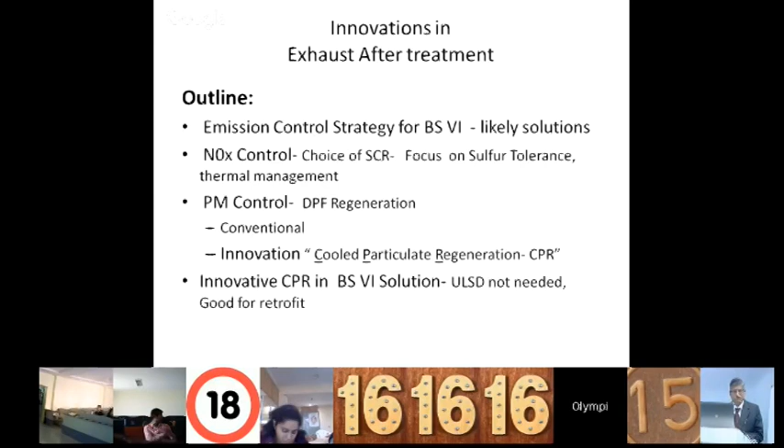In this program, I'll talk about the emission control strategies for BS6, what are the likely solutions seen internationally. India is yet to implement them in 2020, but our preparation is going on. There are two major issues: NOx control and PM control. So what can we do here, and what are the types of innovations in these technologies.

Because once India implements this in 2020, the world will have already implemented it - the US has implemented it, Europe has. So we have some choices available. What can be the right choice for us? This is what we have to focus on.

Then I'll speak about some innovative solutions where I'm involved and feel they are good for the country.

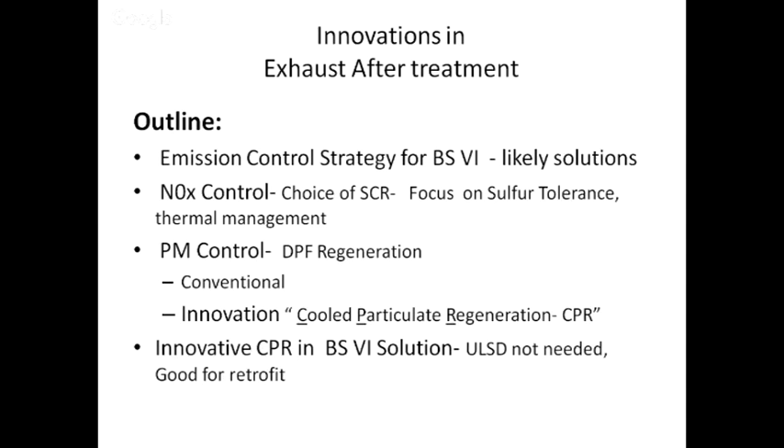One thing is very clear: in any control strategy, we have to control both NOx and PM. In an IC engine combustion, there is a trade-off - if NOx goes up, PM reduces. You can have technologies to improve PM, but then NOx goes out of hand. This simultaneous reduction of NOx and PM, which is the aim going from Euro 3 to Euro 4 and Euro 4 to Euro 6 level, poses problems and challenges. Of course there are a few technologies, like fuel emulsion.

Last year, in this same forum, I talked about some technologies which can reduce both NOx and PM together - water and diesel emulsions, which bring down peak combustion temperatures. But traditionally, an engine with normal fuel will have both NOx and PM going against each other - if you try to control one, the other goes up, or vice versa.

So we need to handle it in the after-treatment systems. And how do we do that?

Another thing that makes India different, or every country different, is the type of engines produced, the maintenance practices followed, and the driving cycles - because congestion differs across countries, and even across different cities in India. So there are challenges and opportunities which I will call local. It's not necessary that what is good for the US system is equally good for Indian applications - some tuning will likely be required in any case.

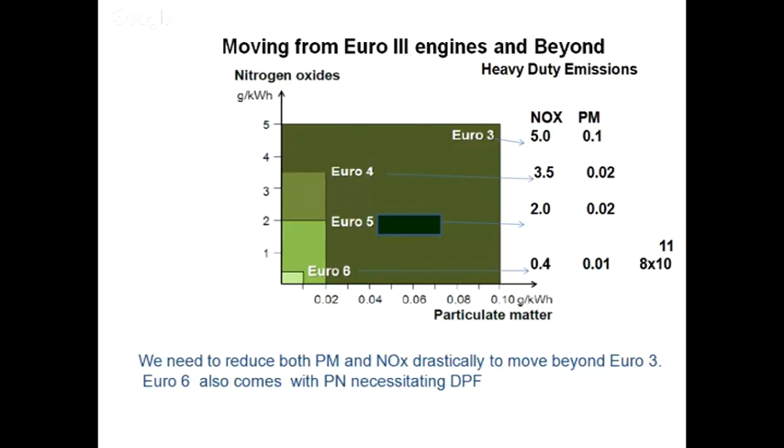Euro 6 also comes with PN limits which necessitate DPF. Before I move further into the program, I'd like to introduce a few terminologies here which we will be referring to in the next slides.

There are a few technologies which are PM related, that is, reducing particulate matter. For example DOC, the diesel oxidation catalyst. There's a partial oxidation catalyst which is called POC. Then there's a diesel particulate filter, and there's a new innovative technology called cooled particulate regeneration. Because when you have a diesel particulate filter, what happens is the filter absorbs the carbon soot onto it and sends

the clean exhaust out. But then with time, the filter gets choked, which creates back pressure. So you need to regenerate it. There are technologies for regeneration on DPF, which we'll be talking about.

Then there's NOx related technologies like EGR, exhaust gas recirculation, which is an internal management technique to reduce peak temperatures in the system so that NOx comes down. Then there's SCR, which is based on urea injection or other technologies. Once you have urea in the system, urea converts to ammonia, and ammonia does the reduction

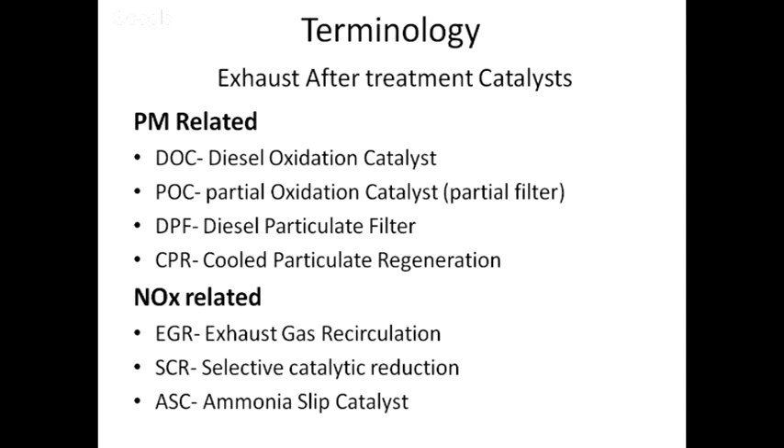part. But then ammonia also slips. If you have more urea, then more ammonia comes out, and you can't allow more ammonia to go to the atmosphere because it's also toxic. For example, BS4 has a limit of 20 ppm maximum ammonia that can escape. Similarly, in Euro 6 you have a limit of only 10 ppm. So these are the types of catalysts which you'll be using in the system.

So I said that challenges and opportunities are local in BS6 and its equivalent. If you look at Europe, Euro 6 has been there for the last 4 or 5 years. So the first generation vehicles which came as Euro 6 were basically having solutions like DOC, DPF, SCR, and ammonia slip catalyst.

And SCR was a particular type, a copper zeolite which was sulfur intolerant. So they could introduce sulfur at low levels, and they could live with copper zeolite. So heavy duty manufacturers then revisited this, but there was a problem. The solution which came up first in Europe was giving a fuel penalty to the engine.

It means in regenerating DPFs, they were burning more fuel to get to the high temperatures where they can regenerate the DPF, burning the carbon from the DPF and bringing down the back pressure. And since temperatures were going out of control, they needed a catalyst which can survive, and that was the copper zeolite catalyst. But then they started relooking at other options that were less expensive in terms of catalyst cost and fuel penalty on the engines.

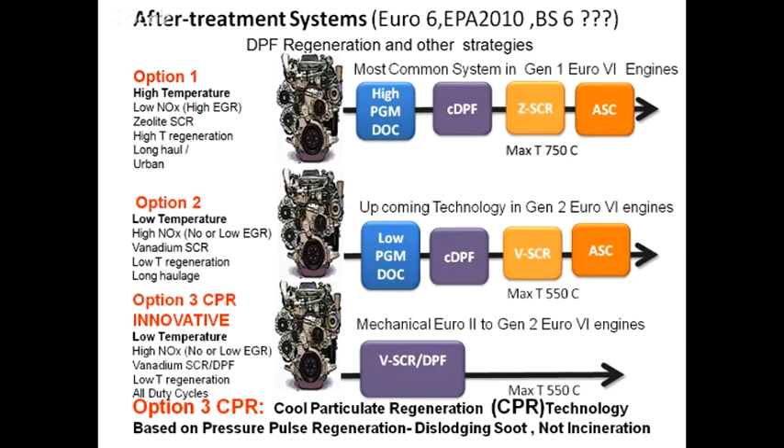So the logic is that the exhaust stream comes with lots of soot particles, comes to the DPF filter, and gets absorbed because of the exhaust energy impact. Is there a way I can de-impact it, or dislodge it from the system? That is how this patent research has been done.

So a few more slides which I'll continue here. I will be using data from 2 companies here, and therefore I want to acknowledge that.

The thermal management and low temperature pulse regeneration is courtesy of Haldor Topsoe, Denmark. I have taken some slides from them, and I had privy to this information because I worked as a consultant to Haldor Topsoe, the Denmark company.

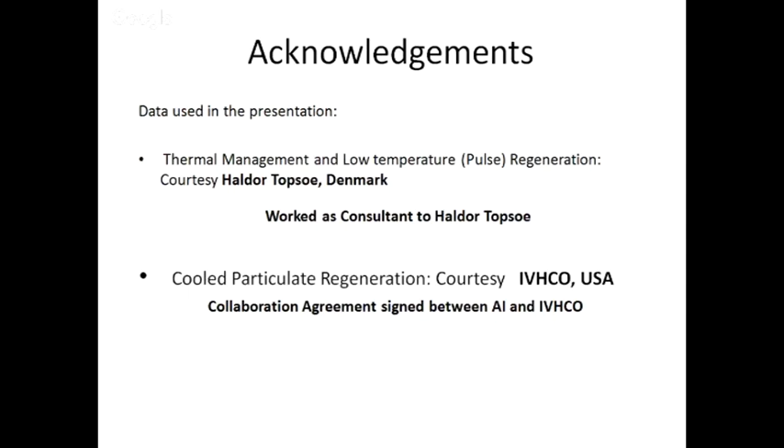And then there is some data which I'm using from cool particulate regeneration. This is courtesy IVHCO, Indus Valley Holding Corporation, USA. We have a collaboration agreement with this company - I'm part of a small group, private limited company, and we have a collaboration with them. So that data I'll be using.

As I said in the beginning, there are two aspects: reducing PM and reducing NOx. Reducing PM needs temperatures to be raised to burn it. This is the conventional wisdom for existing systems. You raise temperatures, but if you raise too much, you get into copper zeolite or iron zeolite catalyst territory, because they can survive high temperature. But if you can manage your reburning of the DPF within minimum temperature ranges, you can have a choice of a different SCR, which is vanadium based. So these few slides are about this.

Cost is always an issue in India, so we must be looking for an SCR which is low cost. We must look for a technology which reduces both fuel and urea consumption. Most likely in BS6 our fuel economy will go down once you put all these things together, because there will be urea consumption and also the issue of maintaining certain temperature levels. So I believe a BS3 engine may be more fuel efficient but bad on emissions, while Euro 6 will be good on emissions and slightly inferior in fuel consumption, or urea plus fuel put together.

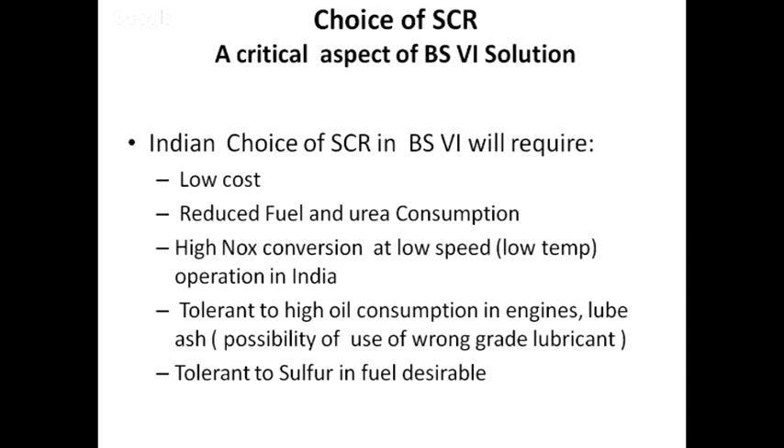And if you want more NOx conversion from the engine, you have to raise it to higher temperatures. That means to come to Euro 6 level, you also have to control your starting NOx. If you have some EGR, some SCR, these combinations can work better in terms of percentage of NOx conversion reduction possibilities.

There will always be an issue: you can pass an RDE test, but what happens to low speed driving, low real world driving emissions? And then how do you get to NO2 of that level? That's another issue, because the exhaust does not naturally produce this much NOx, or rather this much NO2 level.

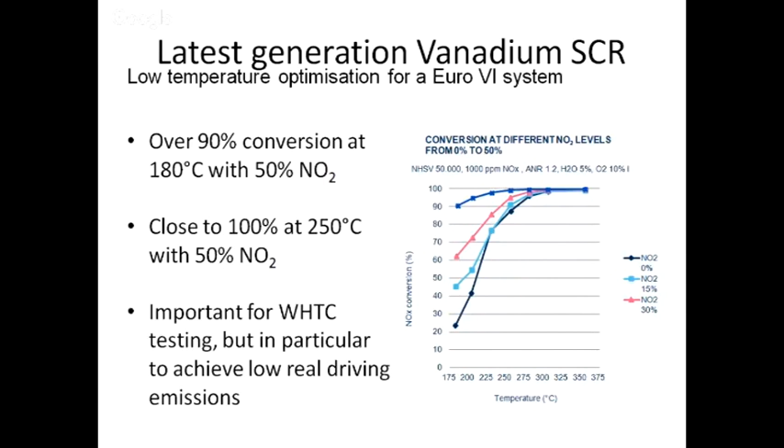Some part of particulate matter, known as the oil soluble fraction, SOF as they call it, can be burnt in the DOC. The hard soot carbon cannot be burnt in the DOC. It has to be brought to the DPF, captured there, and burnt. That is how it has to be.

So this combination where you use vanadium is very attractive for the Indian context, I believe. One, they are low cost SCRs. They can work with low system PGM, the platinum group metals. Then it affords high conversion ratios of NOx at low temperatures, and can be used with and without EGR, and moreover it's sulfur tolerant to a great extent.

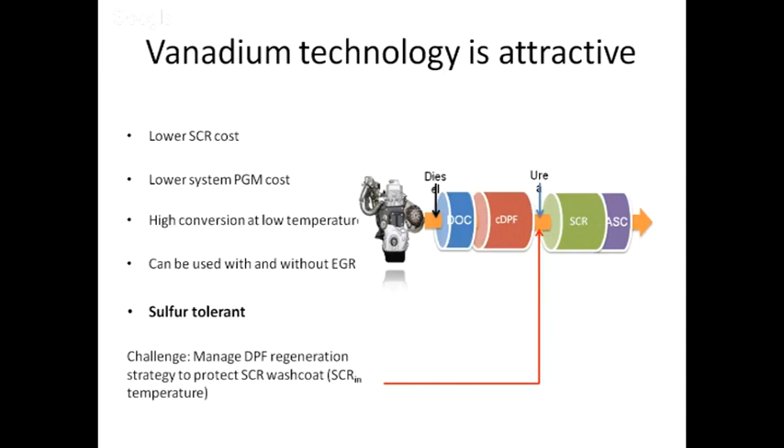So this management of DPF regeneration will take us to the second part of the talk. Of course, there is also sulfur. I have talked about this sulfur tolerance of the SCR catalyst.

See, what happens is, vanadium catalyst is very good at handling sulfur - that's why they call it sulfur tolerant. It becomes inactive, no doubt. Sulfur gets into the pore sites, and slowly the activity goes down over time, as you're saying.

But the moment you raise its temperature, the sulfur gets activated again, the SCR gets reactivated, and you achieve the same level of conversion. So there will be some drop in the activity, but the moment the temperature goes up, it recovers its activity. That's why we call it sulfur tolerant.

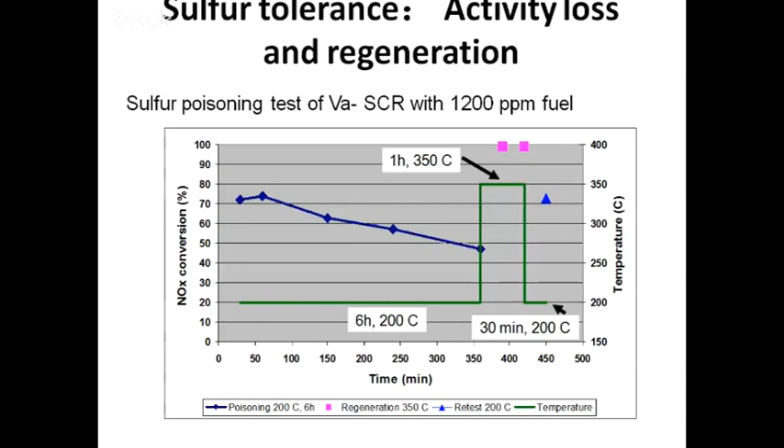It's not that sulfur doesn't affect it - sulfur does affect it, but much less than in copper zeolite systems. Sulfur is also poison to DOCs, so we need to address that issue - reduced sulfur is always better.

Deactivation caused by pore plugging of ammonium bisulfate - this deactivation is reversible. With ultra low sulfur fuel, the issue is minimal. So this is what I said, that when the temperature goes up, it can be reactivated.

Zeolites, copper zeolites, are also sensitive to ammonium bisulfate. For copper zeolites, sulfur also reacts with copper and forms copper sulfate, which needs high temperature to be regenerated. Therefore, you have to go to 700 plus degrees, as with the generation-1 Euro 6 solutions in Europe.

I talked about copper zeolites - even very low sulfur fuel leads to a noticeable deactivation over time, and therefore regeneration is necessary. So frequently, you will find that the 7th injector, or the exhaust injector which I showed in the previous slide, has to be operated more often with copper zeolite solutions.

So what is the key message in SCR for NOx control? Vanadium technology is cost effective. There has been a trend of more vanadium use in Europe, bringing lower cost of both the catalyst and the PGM used in the system. So you can have a DOC with low PGM, and DPFs catalyzed with low PGM, platinum and palladium.

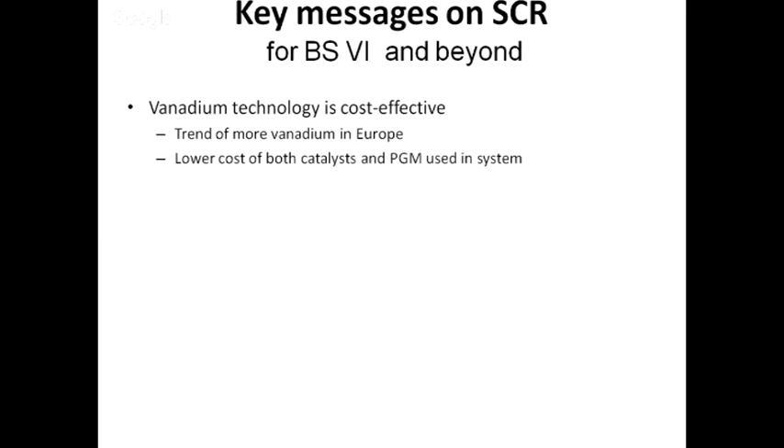Sulfur tolerant, high conversion and low temperature. These are important to us in the Indian context, that's why I'm highlighting them. And then it's futuristic as well.

In the US, the focus now, they've already controlled emissions to Euro 6 and EPA 2013 levels. Then they are talking about greenhouse gases. So far the focus was on CO2 from the exhaust. Now they've found out N2O is more reactive in the category of greenhouse gases, so they want to control N2O.

If you look at that future trend, obviously in India that will also follow, maybe after 2020, 2025 or 23, you will have government talking about N2O and things like that. So why not capture it right now? Vanadium is good in that. I have a lot of slides on this which I thought are not needed here for the moment, but just to leave a thought process that this is a futuristic technology which will take care of newer emissions.

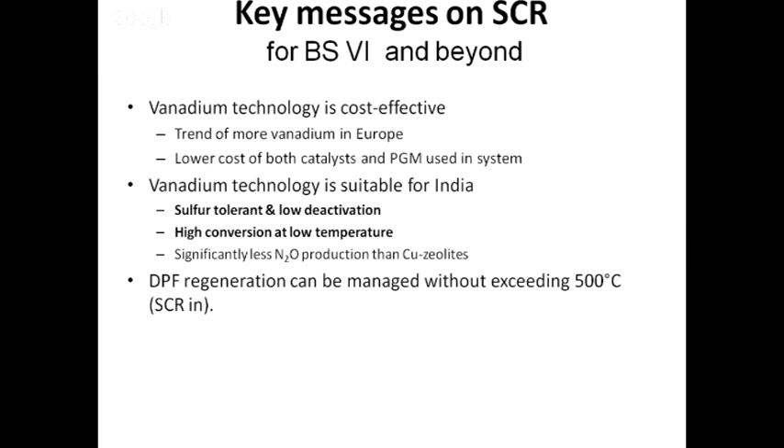Then the hurdle so far was that SCR has to be maintained below 550 degrees C. Can we do DPF regeneration? This can be managed without exceeding 500. So what is the innovation then? The innovation is that I can even use non-thermal DPF regeneration technology, which is most suitable for Indian driving.

Both CPR and DPF are sulfur tolerant. So these are the positive points of this type of SCR-DPF combination we are talking about for this country. And then how do we manage the regeneration? That will still be an issue because we have had no experience.

Actually, when the government says you have collaborations, you are exporting vehicles and bringing new technologies from abroad, they probably fail to notice that our driving conditions are very difficult. It's fine to have legislation, and OEMs will also meet it on the ARAI test beds and things like that. But when it goes to the field, what happens if the DPF does not get regenerated? What will people do? What is our experience with CNG city buses in Delhi?

The three-way catalyst, people removed it because it was not functioning or it was creating back pressure issues. So NOx from CNG buses went up. Similarly here, the new bus will come from the factory, well certified by ARAI and other institutions, meeting all Euro 6 specifications. After 500,000 kilometers, the DPF will stop regenerating because of our low temperatures in the country, and people will remove the DPF and have ordinary silencers instead.

You also said that we have low temperatures there. What does that mean? When the vehicle runs in city driving, traditionally you don't run at high speeds and things like that. So the exhaust temperatures which come have been profiled - they are not more than 180 or so. There will be some peaks going up, but most of the time it is lower than that.

And urea in the SCR system cannot hydrolyze below 180 degrees C temperature in the exhaust. So exhaust temperature has to be raised before that, before SCR becomes effective. This is what I mean by low temperature in driving conditions.

There is another argument people make, that our city buses are overloaded, so you must be putting a lot of throttle, and that will raise temperature. But all the data I have seen, even on overloaded buses, because the speed is so low, the temperature of the exhaust is not going up. So you will have difficulties regenerating the DPF, and difficulties hydrolyzing urea to control NOx. This is what it means.

The engine must run at higher RPM to... Yeah, it has to have that.

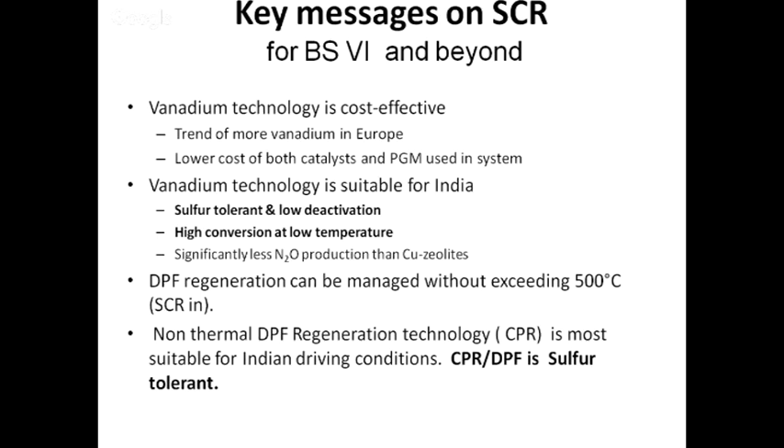NOx is a function of temperature in the exhaust system. No, sorry, combustion temperature, the in-cylinder temperature. That is also a function of speed. That need not be. Combustion will always produce particular temperatures in the combustion chamber. Once exhaust comes out, the type of air flow and the way it is exhausted helps vary the ratios. But within the system, if you maintain the same temperatures, it will produce similar levels of NOx. High temperatures produce high NOx, low temperatures produce low NOx.

Therefore, EGR has come in, exhaust gas recirculation. What it does is take some of the exhaust gases and put them back into the engine, so that the reactive part of the air-fuel mixture is reduced. That's how NOx levels come down, because temperatures decrease due to the inactive material within the combustion chamber.

Any other question? Can we move on? Is there any audience from the satellite centers with a question so far? Is there any question from any center? Please ask, because then we will move to DPF regeneration. So this was up to NOx. If not, then we move on to the next part of the lecture.

Vanadium is a catalyst, V2O5, and we have a problem with its high temperature. V2O5 is volatile at some temperatures, or it leaves its wash coat where it is stuck on the catalyst. Attrition takes place, so vanadium comes out as particles themselves. And vanadium is associated with toxic nature, so it should not be allowed to leave the DPF.

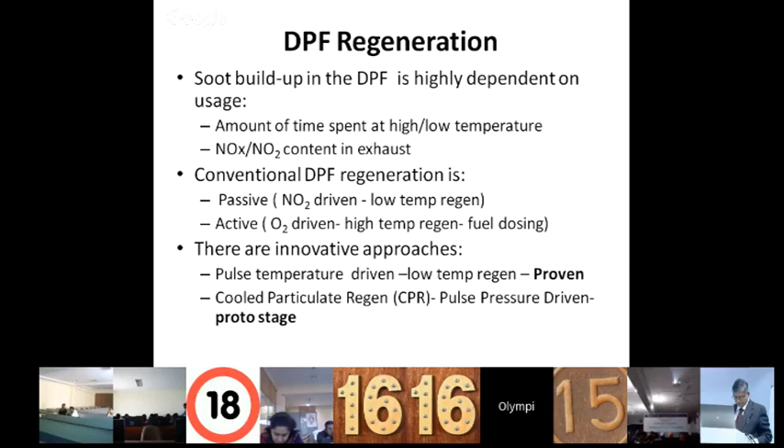There is a very interesting US regulation. The development of SCR is pre-DPF. Actually, before DPF, SCRs were developed all over the world, that's the sequence. So in the US, they said SCR-DPF can be used, SCR with vanadium can be used if there's a DPF after it. Some of the older vehicles have this arrangement: first the SCR, then the DPF. So if attrition takes place by mistake or by mismanagement of the fuel, the DPF doesn't allow those particles to go to the atmosphere.

So only one or two such systems were allowed in EPA systems. Today, traditionally, if you look at the pictures I've shown, the DPF comes first, SCR later, because DPF needs more temperature generation. So if you put it block after block, brick after brick, and the DPF is the last brick, you will never have temperature reaching that. So you have to bring it as close as possible to the exhaust manifold. This is what is probably needed.

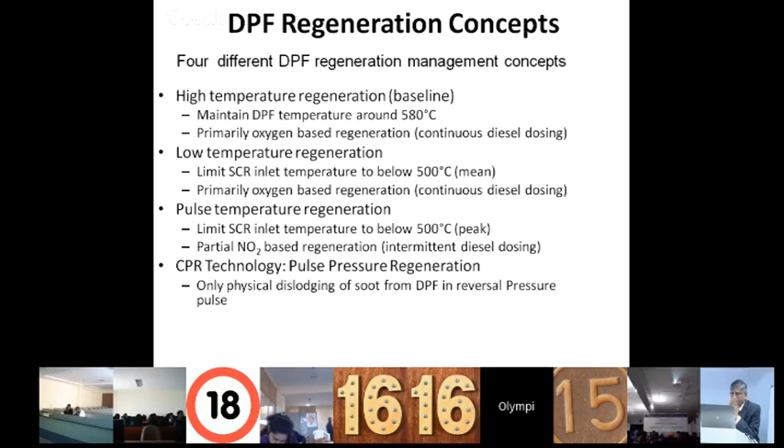So basically, in DPF regeneration, 4 concepts exist. I briefly touched upon this, but let me summarize again. One is high temperature regeneration, meaning the baseline temperature is always higher than 550, or 580 actually. That is how we have started defining it. Because up to 550-580, vanadium can work; beyond that, copper zeolite has to work. So conventional high temperature regeneration has a baseline of 580.

This is based on continuous diesel dosing, either through the post injector or the 7th injector, which has to continuously put fuel to keep the temperature high. Because I said 180, 190 will be our temperatures, their temperatures may already be 250 in some usages, so they will need less fuel to put in. In India, we will have to put more fuel to bring the temperatures to that level. So this is high temperature regeneration.

It's not recommended for India, in my personal view. But I'm also aware of some OEMs who want to work with copper zeolite, because they say we will deliberately ask to raise the temperatures, but we don't want any field problems. Because if the temperatures are not adequate, if regeneration cycles are not maintained, you will have problems in the DPF. But their views, as always in technology, there are pro views and opposite views.

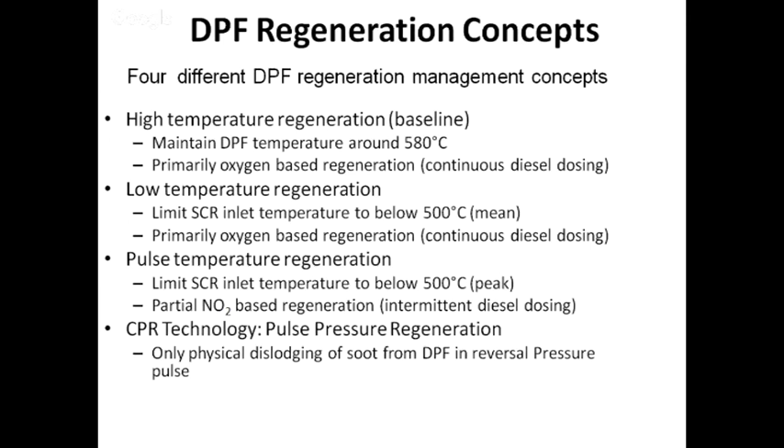I am personally very impressed because it is doable, and of course he is also trying further innovations - can this soot be brought directly into the lubricant, so that dumping at a later station need not be done, or it can be blended into the fuel so he can reuse it. This is a part of research. It's a research group which is focusing on it.

Okay, so this was low temperature regeneration. Out of that, I thought we'll share some of it. So soot can react either with NOx, oxygen, or NO2. While dosing diesel to increase the temperature, NO2 production in the DOC is inhibited - that's what I told you. If we exploit NO2 production over the DOC, we will help lower the DPF regeneration temperature below 550 degrees C. That is the basic philosophy of Haldor Topsoe in making this catalyst work with temperature pulses.

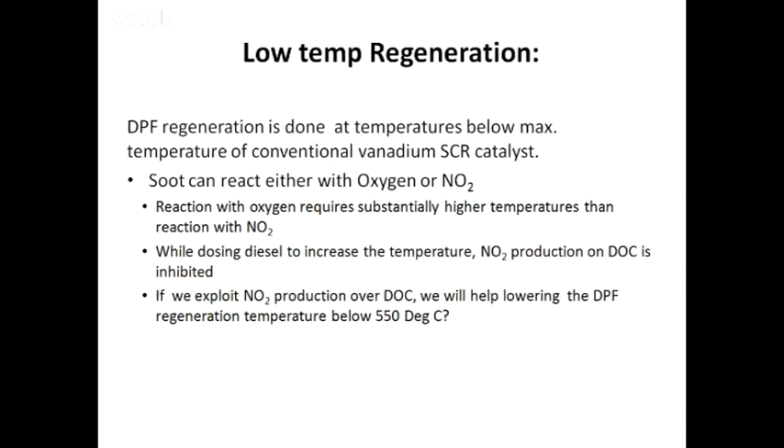So this is the type of pictorial scenario that happens. As soon as the DPF back pressure goes up, he has to operate - give a pulse, raise the temperature, so it burns a little bit of soot. Then that little bit of soot burns, the pressure comes down. So though it's a temperature pulse given, in the schematic it is the DPF which is getting regenerated on each pulse. On average, he maintains a temperature profile which is lower than 550.

At high temperature, they just take 2 grams of soot per liter of catalyst volume, which they regenerate. They don't allow it to go beyond, say, 20-30 grams per liter of DPF and then regenerate, like some of the high temperature guys will do. What they do is allow it to accumulate, and when they reach a point where the engine will start misbehaving because back pressure has gone up, that's when they will pump more fuel and burn it off. That is the traditional way of regenerating.

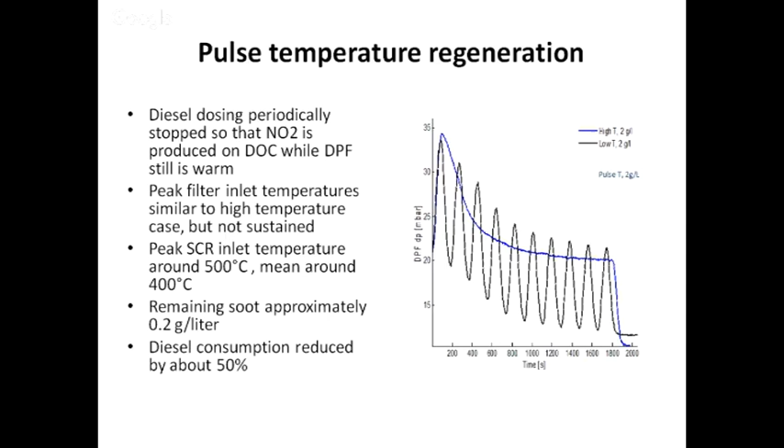But these guys in Denmark don't do that. Their philosophy is, every time soot comes to the filter, very soon they raise a temperature pulse, bring it down. So continuously they keep doing this. That's why they call it a pulse.

So what are the key results? Filter regeneration is possible at low temperatures.

What is the advantage to an OEM and a user? The user saves 50% on fuel because he need not waste fuel and need not inhibit the tendency of the natural exhaust to burn soot to some level. That is what NO2 was doing. In deliberate soot regeneration, you have actually killed that inherent possibility of NO2 to generate - you are putting in fuel, so the DOC takes in more oxygen and burns it.

And then with external diesel dosing or post injection managed without exceeding 500 degrees C, that's what it's all about. This also allows you to lower catalyst and PGM costs by using Vanadium SCR.

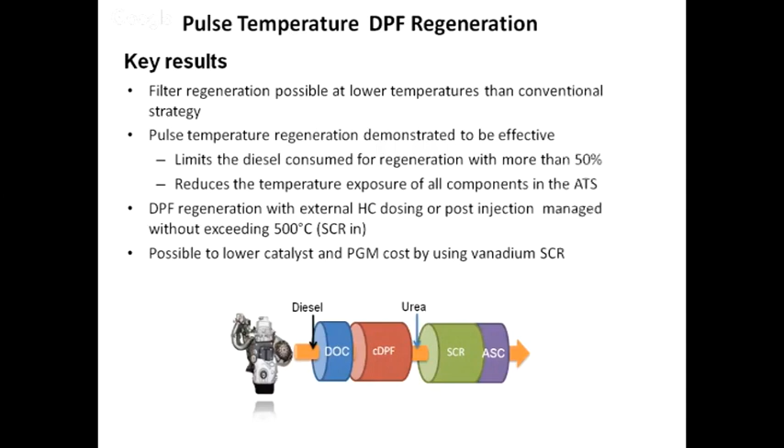Okay, in understanding DPF regeneration, we also have to understand the role of DOC. We have said how to manage DPF regeneration so that survival of vanadium catalyst happens. This was part of my process of thinking so far. Now we need to see what we can do about catalyzed DPF and DOC, and do we understand their functions properly before we really attempt a DPF regeneration?

So DOC for low temperature systems - there are two categories now. We have defined that for SCR to survive with vanadium, we need a low temperature regeneration system. For copper zeolite systems to survive, we have to have a high temperature, which has positives and negatives on both sides. So for low temperature systems, you have PGM load - platinum group metals load - which is 10 to 20 grams per foot cube of catalyst, a mix of platinum and palladium. This is considered a high level of platinum. One of the only reasons to go to high temperature is to desulfurize the carrier.